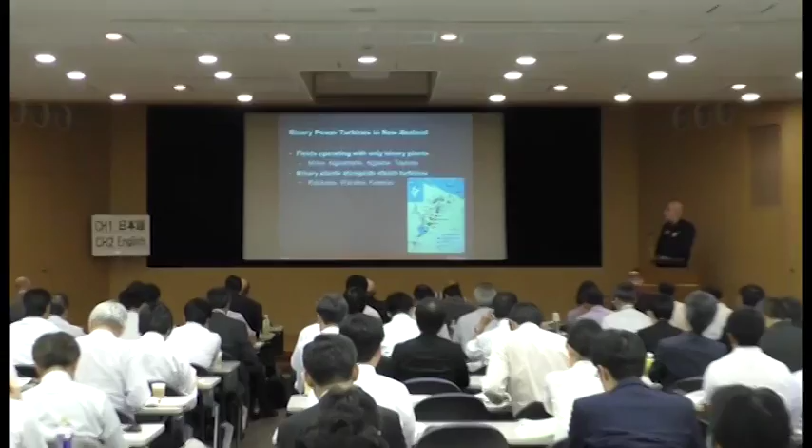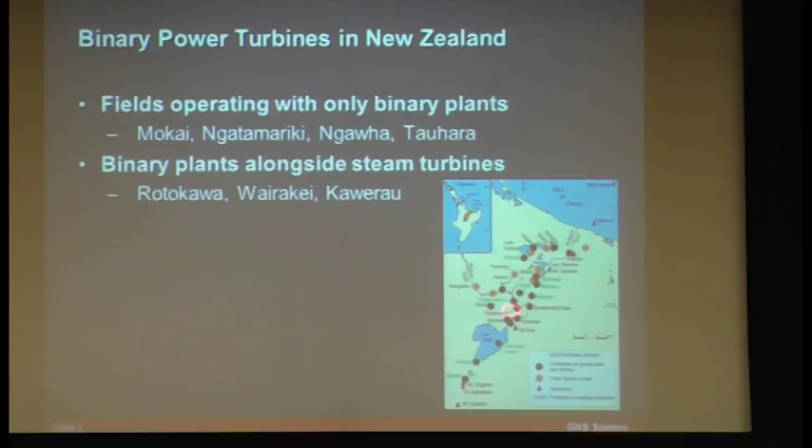There are a number of binary power plants operating in New Zealand. Fields with plants are noted here. We also have three other fields where binary plants are operating in conjunction with a steam turbine: Rotokawa, Wairakei.

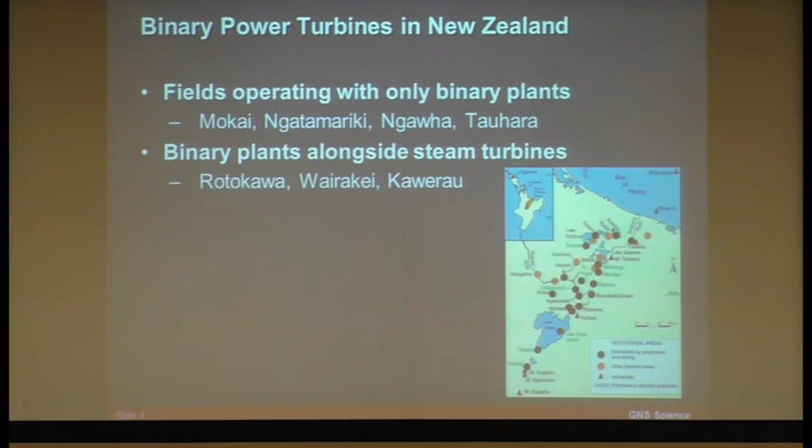Looking briefly at a couple of examples. The Mokai geothermal field has been developed by a local landowner using combined cycle technology, developed in stages. The initial stage was a 60 megawatt development, and then there was an expansion, and currently they're operating at about 110 megawatts.

Given the nature of the reservoir, probably the best option for generation of electricity may have been a steam turbine, but because of the need to stage the project, the decision was made to use binary plants. That choice has added to some of the complexity in operating the reservoir, but the modular design has had benefits. There's been some pluses and minuses from this arrangement, but overall I think it's been a reasonable choice for the development of that field.

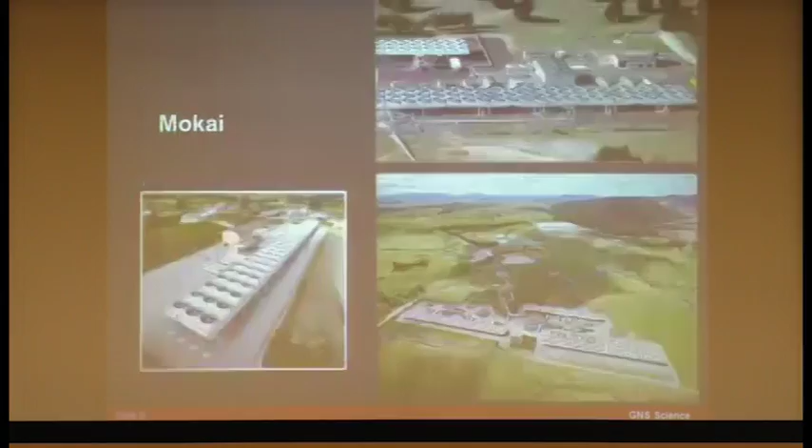The second example of a binary plant that we have is at the field Tauhara. This is a 25 megawatt development, which was originally planned for a specific industrial use. However, the situation changed, and it was decided that the plant would be used to generate electricity for the national grid. At that size of development, a binary plant was the best option.

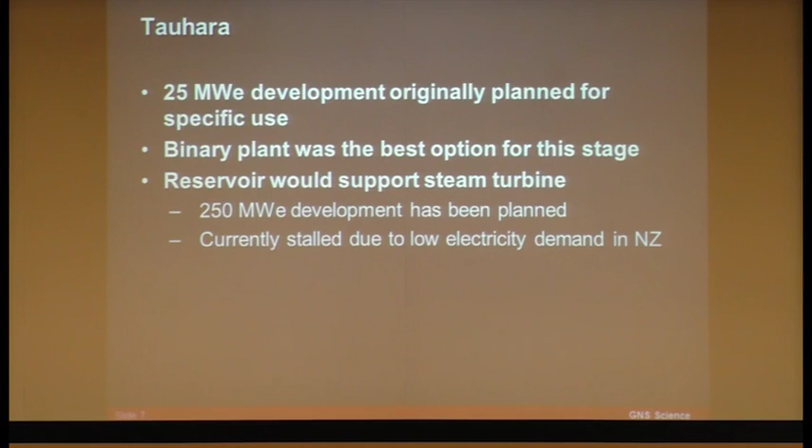Once again, in terms of the reservoir, it may not have been the best option. Perhaps a steam turbine could have been better. At this stage, there are plans for a 250 megawatt development of that field using a steam turbine, but as was discussed earlier in the day, some of those plans have been stalled due to low demand for electricity. So here we have a couple of examples of binary plants that are in use that have come about more from the arrangement of the project and the necessity, the planning of the project, rather than related to the aspects of the reservoir.

We also have a number of fields where we have binary plants operating alongside traditional steam turbines. As was mentioned earlier this morning at Wairakei, there is a small-scale binary plant that is extracting heat from some of the separated brine.

At Kawerau, it's a complex situation. Over the years, some of the steam has been used for direct use, and now quite a bit of it is being used for electricity generation through a steam turbine, but there have been three small-scale units developed by local operators. They are small-scale, 14 megawatts in total, and again, the optimal choice for that has been binary plants.

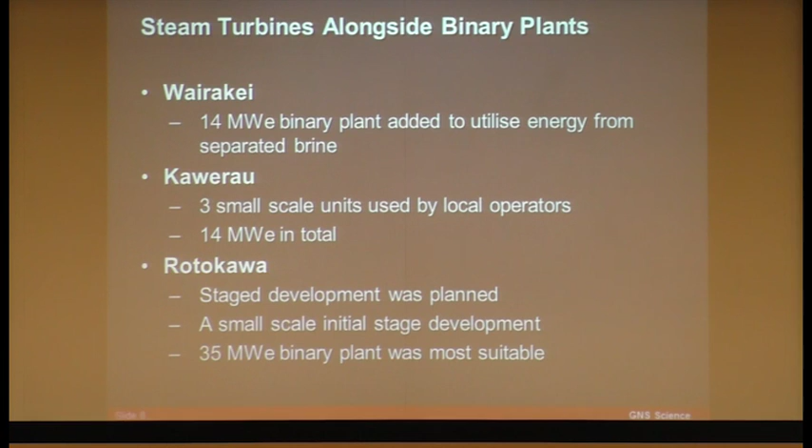Again, this is related to the logistics of the project impacts rather than the reservoir conditions themselves. Rotokawa is another example. This was a planned stage development with a small first stage, a 35 megawatt binary plant was decided to be the most economic and suitable arrangement for that first stage. Since then, a 140 megawatt steam turbine has been added to that reservoir. So these are some examples where binary plants are in use, but again, the choice of binary plant for these developments has been related to project conditions rather than reservoir conditions.

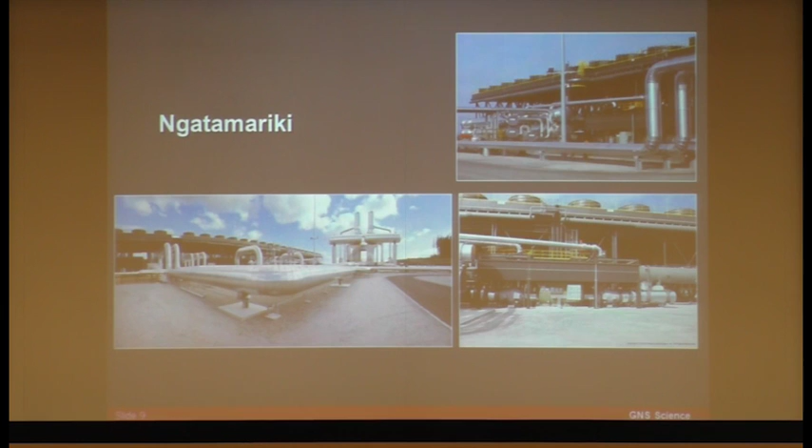The first example of a project where the choice of a binary plant relates to the specifics of the reservoir is Ngātamariki. Ngātamariki is the most recent power station, I think the most recent development in New Zealand.

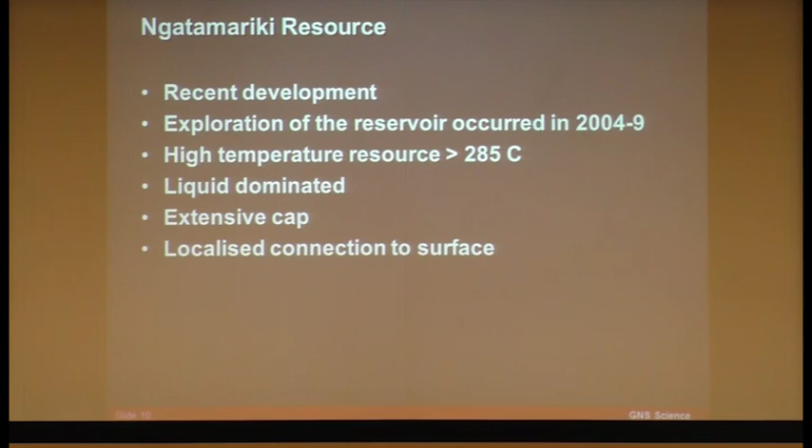Exploration for this power station occurred between 2004 and 2009. It is a high temperature resource with measured temperatures of more than 285 degrees. It's liquid dominated - there is an extensive cap, and through that cap we have a very local area where there's a connection to the surface. I'll say some more about that in a minute.

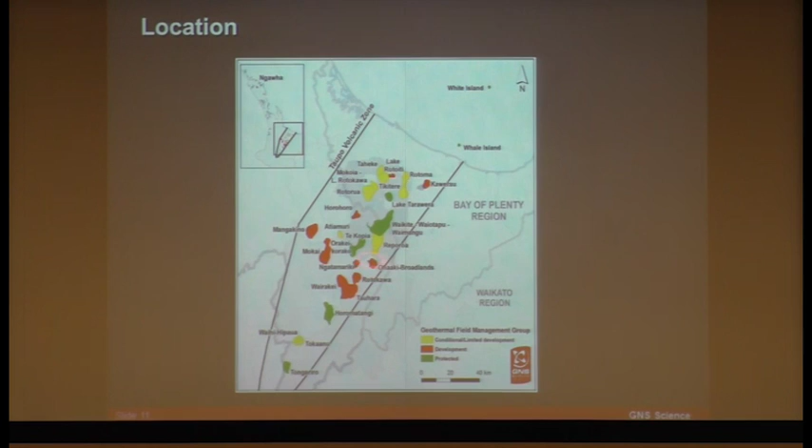Just reminding you again where Ngātamariki is, so it's that field there, surrounding the Wairakei, Rotokawa, and Ohaaki fields. This is a map of the Ngātamariki resource. The green shaded area is the resource boundary that's come from the MT analysis.

There were originally 4 wells that were drilled in the 1980s: NM1, NM2, NM3, and NM4. Then when the exploration phase started in about 2004, new wells NM5, 6, and 7 were drilled.

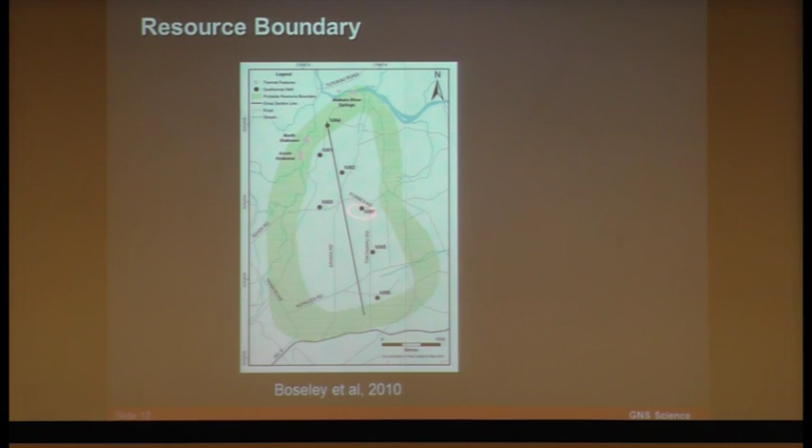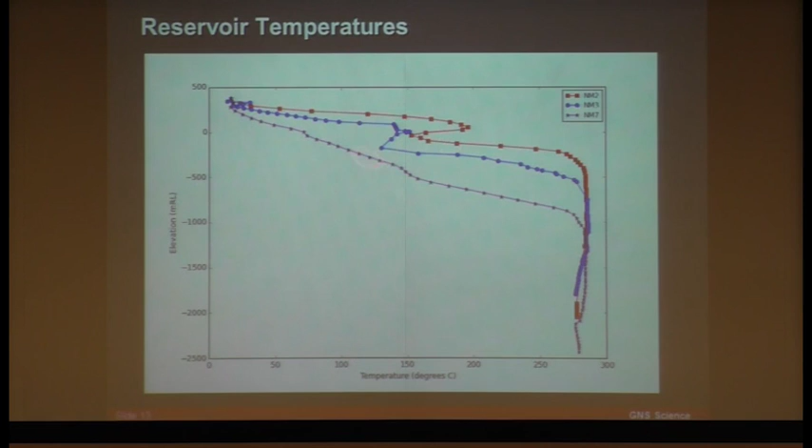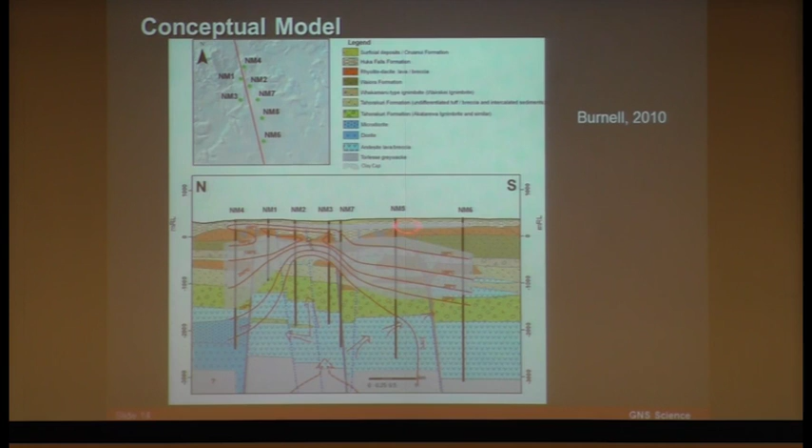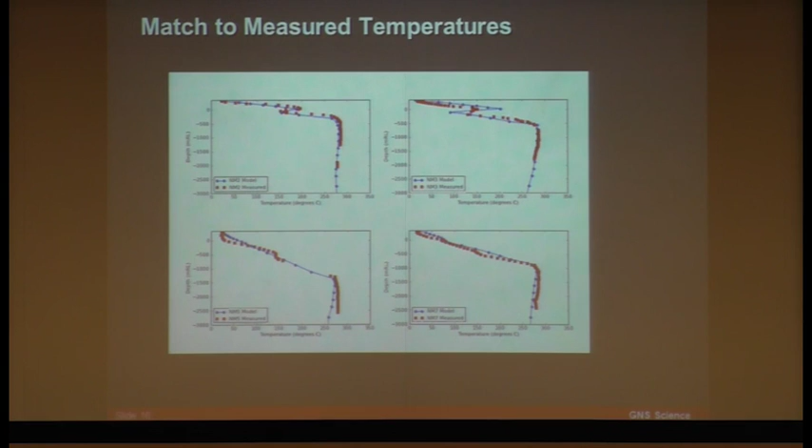As part of the exploration phase of this work, we undertook some reservoir modelling. This is the grid that we used for the model. As I mentioned earlier, we worked through the same process, matching the natural state temperatures - these are matched some of the natural state temperatures. But in this phase of the work, for this reservoir, we had no production history. The reservoir was not producing, so we did not have a production history to match it.

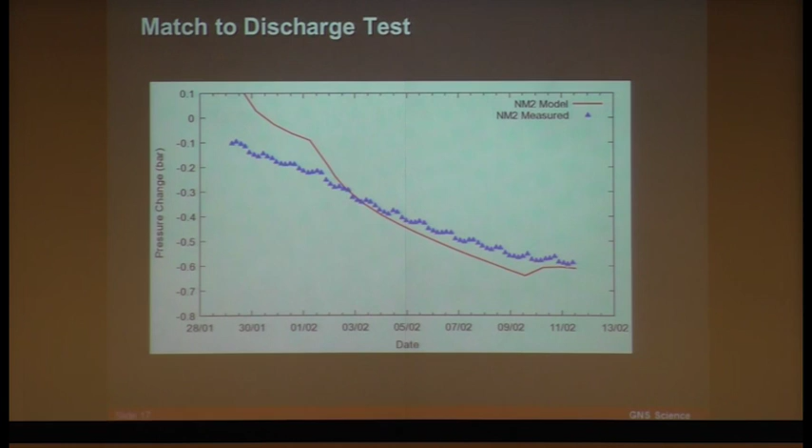We had a little bit of data - a pressure interference test that was undertaken over a period of about 2 weeks. We used that to calibrate some of the reservoir permeabilities. Based on that reservoir model, we ran a number of scenarios of how the reservoir could be developed.

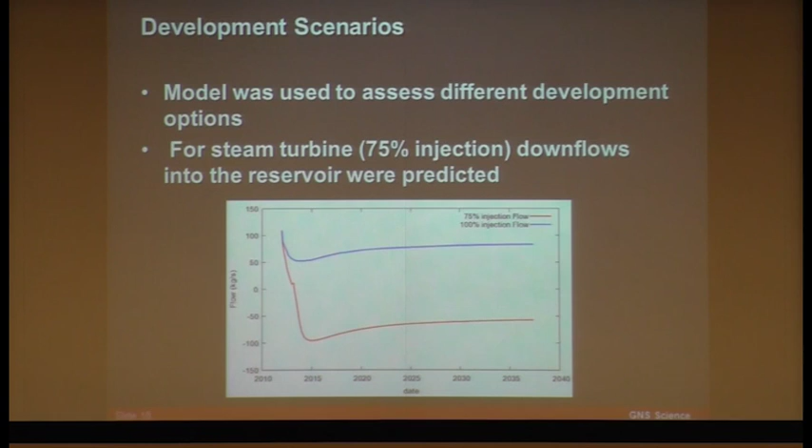One of the important aspects we were looking at was the flow from the reservoir to the groundwater. In the natural state, we're seeing something like 100 kilograms per second of flow out of the reservoir. If we run a scenario with a conventional steam turbine, with perhaps 75% injection, we find that outflow reverses to a downflow, so now we have colder groundwater coming back into the reservoir. On the other hand, if we run with 100% injection, we find that outflow is maintained, so we no longer generate a downflow into the reservoir.

Based on these predictions, the decision was made to move to a design for 100% injection. This had the impact of helping to maintain reservoir temperatures, minimising the impact of colder fluid coming into the reservoir, and also minimising any impact on the environment. There are some hot springs related to this reservoir, so maintaining 100% injection means a very small pressure decline and minimal impact on those surface features.

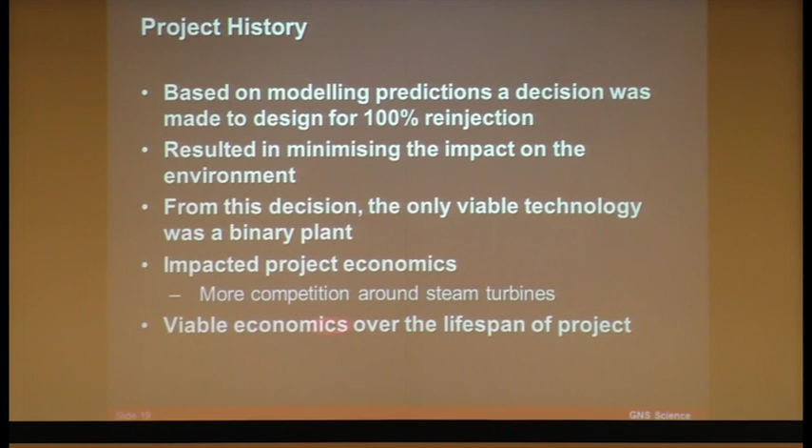Based on that decision for 100% injection, really the only viable technology was a binary plant. However, it did have an impact on the project economics - there is considerably more competition around steam turbines, and the costs are somewhat more competitive. But after quite a lot of work, it turned out that the economics were viable over the lifespan of this project.

So we've now ended up with a project with a 100 megawatt power station. It's the largest all binary single site plant, using four 25 megawatt Ormat energy converters. There are 3 deep producing wells, and 100% of the produced fluid is re-injected back into the reservoir. The injection wells are placed around the periphery of the field to reduce the impact of cooling on production wells. We have found some thermal stimulation of those injection wells, and the field has been operating since 2013 with more than 96% availability.

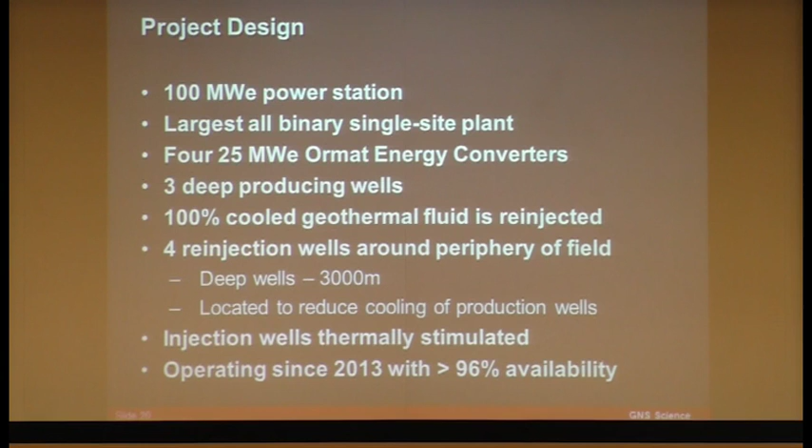I'll now turn over to Simon to talk about the next place for us.

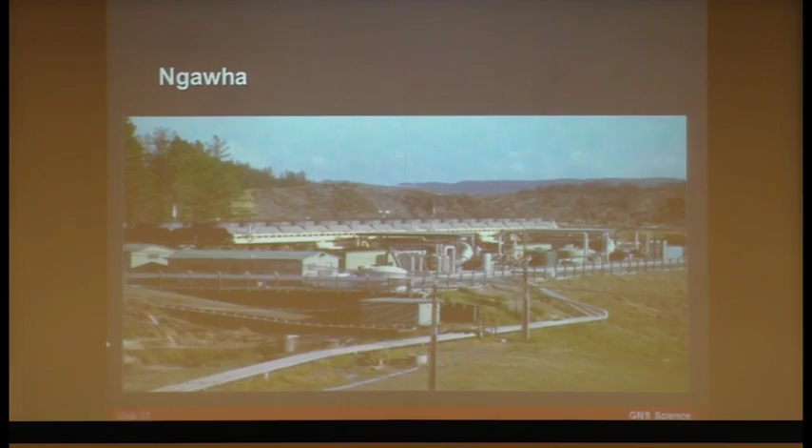This morning we heard from Chris Colby about some of the resource characteristics of the system. So now we look at the development history. This is an example of stage development. It's important to look at the history of the development, because it's a project that was developed through a community trust.

In New Zealand, the buy-in, communication and engagement with communities are a key aspect of the success of the project.

We won't go into detail here, because that is a subject of Andrew Blair's presentation shortly, but it is a key component of business.

The project developed in stages: initially a 10 megawatt development, followed by expansion to 15 megawatts. More recently, GNS has been working with the developer at Ngawha, supporting their increased take from the geothermal field, and they have recently been awarded consents for a further 50 megawatt expansion. As we've heard, the resource is a lower enthalpy resource than the systems of the Taupo zone, so Ngawha's resource temperature is around 250 degrees.

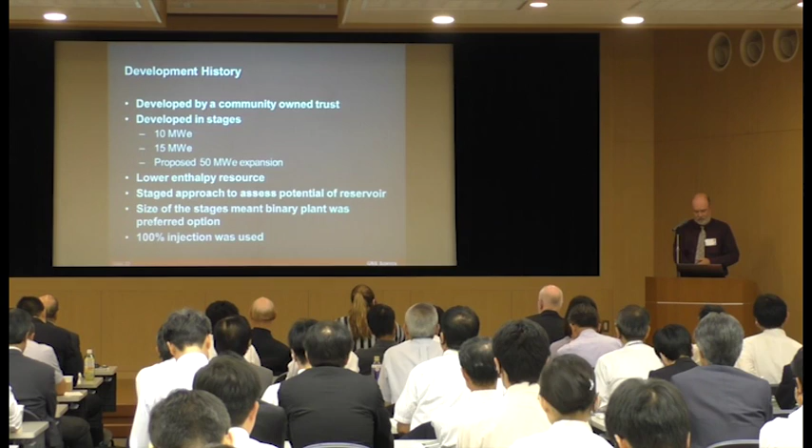A key concern, just as with many developments here in Japan, was the potential effects on the hot springs. We've seen some examples presented earlier, some pictures of the hot springs.

Similarly to Ngatamariki and other places, reservoir modeling has shown that the springs and surface features are sensitive to pressure change. So at Ngawha, as elsewhere, the option was preferred to look at 100% injection as a way to mitigate the possible effects on the surface features.

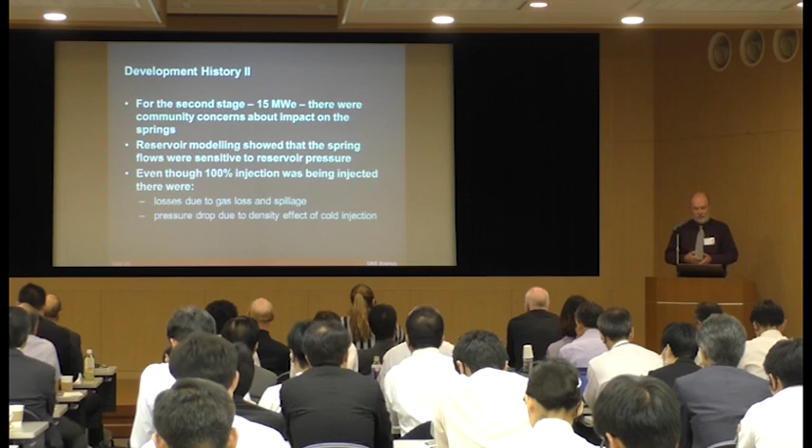Part of that process was to add supplementary injection, because there were some losses to the injection plan. The historical declines were small, but there was an ongoing need to avoid any future decreases in pressure because of concerns that the hot springs might be impacted.

So a trial was conducted, and that demonstrated that pressure could be changed through the supplementary injection process. As a consequence, as part of the consent process in New Zealand, the developer was able to demonstrate to the regional authorities that the impacts on surface features, impacts of concern to the local communities, could be mitigated.

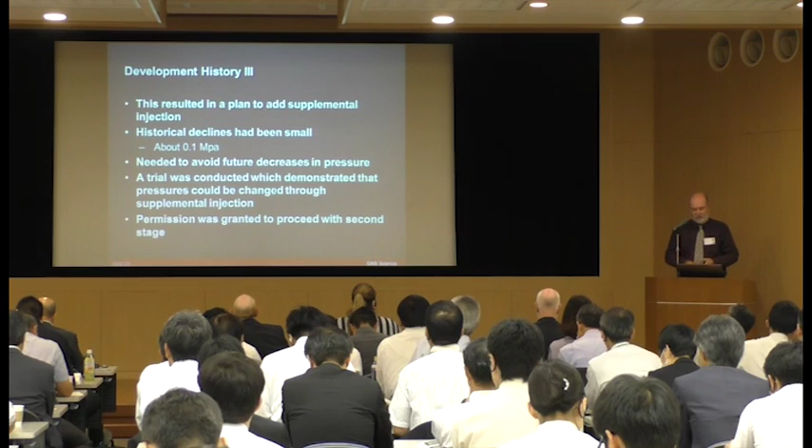With that understanding of the source, consent was granted to proceed to the next stage of development. That stage commenced in 2008, and as a consequence of good science, good modeling, and good communication with the local community, ongoing monitoring was able to demonstrate that there was no clear impact on the surface features. Certainly, changes do occur naturally in large geothermal systems, but that could be very easily explained through natural variation.

As a consequence, after 30 years of operation and new information about the reservoir and how it would perform, the decision was made by the developer to consider expansion to a total of 75 megawatts, and that's the situation we are in today, with those consents having been made.

As part of the consent process in New Zealand, there are still some obligations that the regional authorities who sign consents can impose on developers, and in the case of Ngawha, that is exactly what happened. The conditions imposed on development were that operators must maintain reservoir pressures in the field within 0.1 MPa of 2008 levels, and that they should have no effect on surface characteristics of the springs.

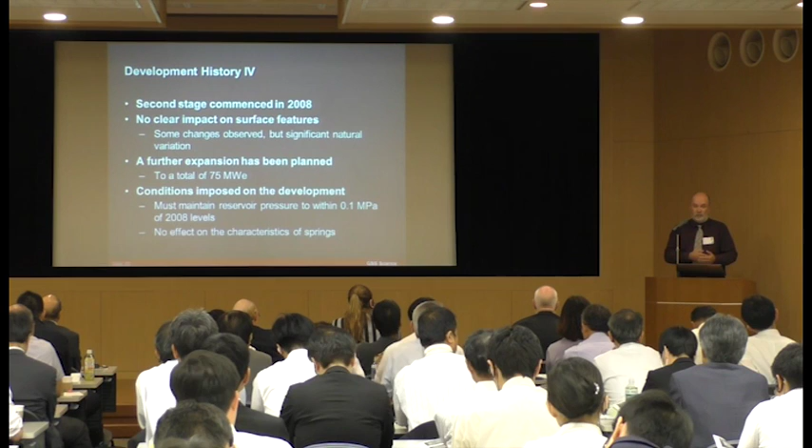So, raising the bar quite high are the expectations on developers at Ngawha, but also at other fields in New Zealand, to maintain and preserve surface features, or to find some process to protect those features if effects are being noticed.

In summary, for the use of binary plants in New Zealand, the major use is for small-scale or staged developments. Project economics are obviously very important, but the use of binary plants adds flexibility because they can be modular, allowing us to build up the development over a period of time as we observe change in the reservoir.

It can also be driven by the need to minimize impacts on the reservoir or surface features, as we see at Ngawha, on the basis of 100% injection.

It's very pleasing that the projects have been successful, resulting in expansions from initial stages: Ngatamariki, Rotokawa, Ngawha, Tahara, Rotokawa expansion, and additional plants being constructed.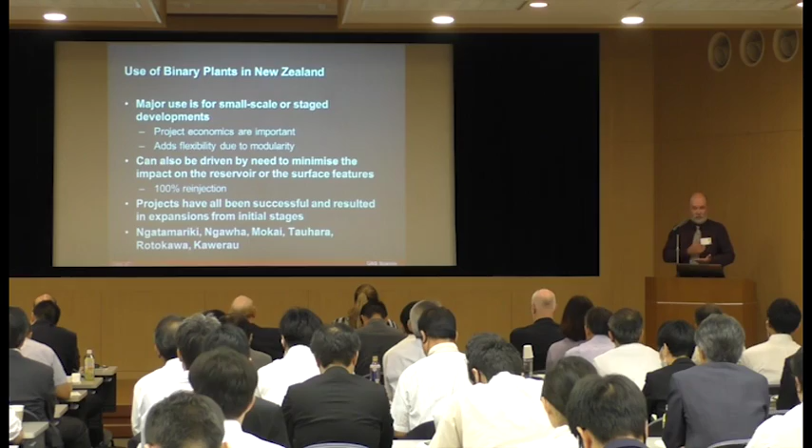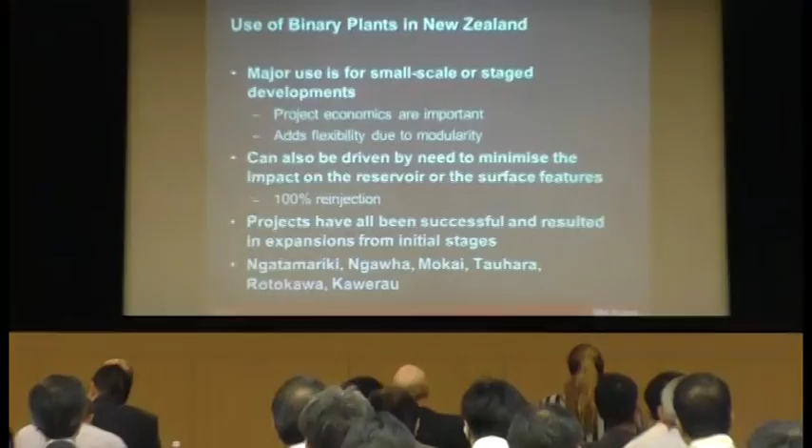Good modeling, not overdeveloping the resources early on, but pitching things at the right level and building up from there. With these staged developments, initial stages can be advanced with small to medium-sized binary plants, assessing reservoir performance, adding expansion, and reducing risk.

As John Burnell also pointed out, the use of binary plants can complement a steam turbine, and the example we demonstrated is a project where we can utilize heat and separated geothermal brine.